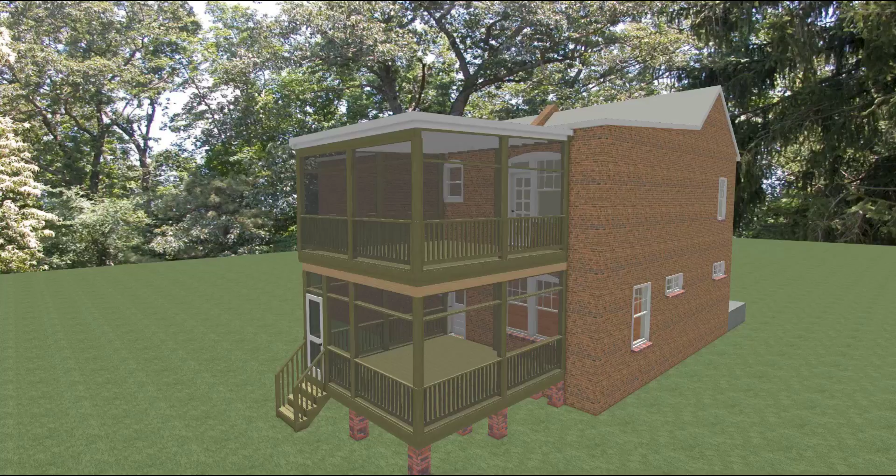Okay, Holly, Steve, this is where we're at for today. Updated the screen porch, got the framing and all pretty much complete. So what I'm looking at, I'm using different color materials just so it'll be easier for you to see some of the things, such as the beam that I'm pointing to there is a beam that's underneath the floor joist. And then the rafters, I'm using a different color for the rafters. Again, just for show at this point. So that way you can see the difference when some of these materials come together.

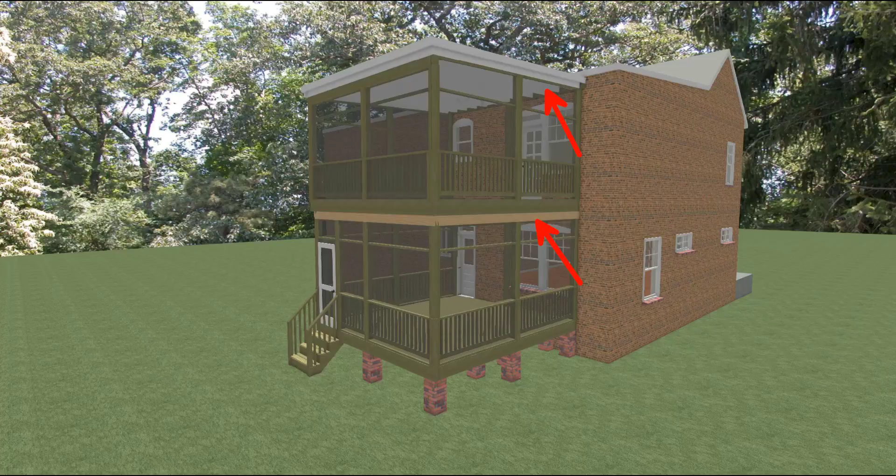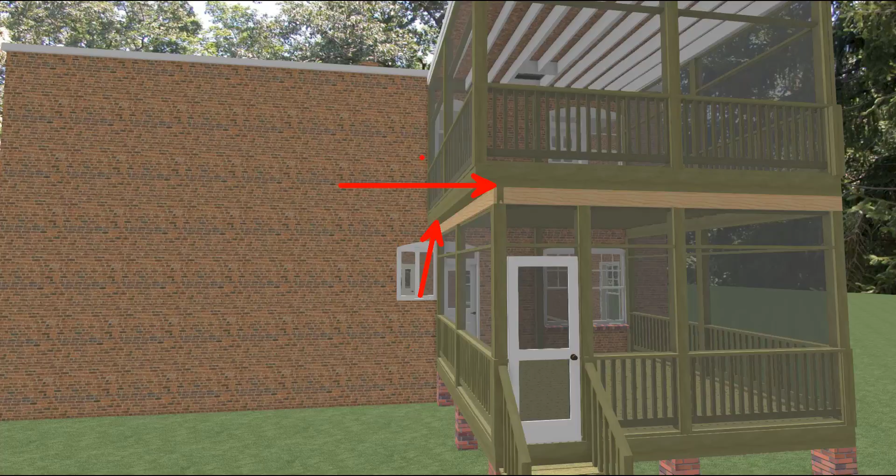So let's rotate this on around. Everything came together very well as I was expecting. So on this side, as we talked about, we do have our cantilever out to this side. So you can see that all the way down. That's 8 inches, gives us just to the outside of that window. So we're all golden with that.

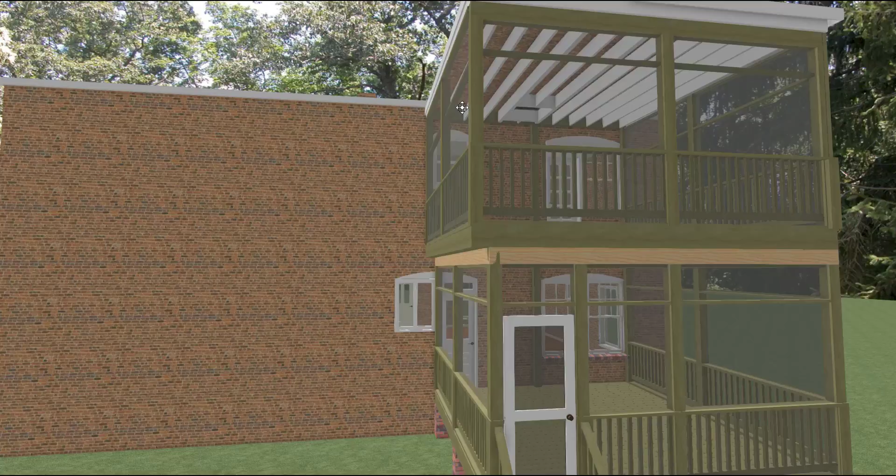Then upstairs we've got that framed in for the roof hatch. And I didn't know if you were looking to do some type of a beaded ceiling or something to that effect. As of right now, I am just showing it with plywood on top of that roof and then all the rafters exposed. So that's one that Steve and yourself can decide on. It's not a permit issue.

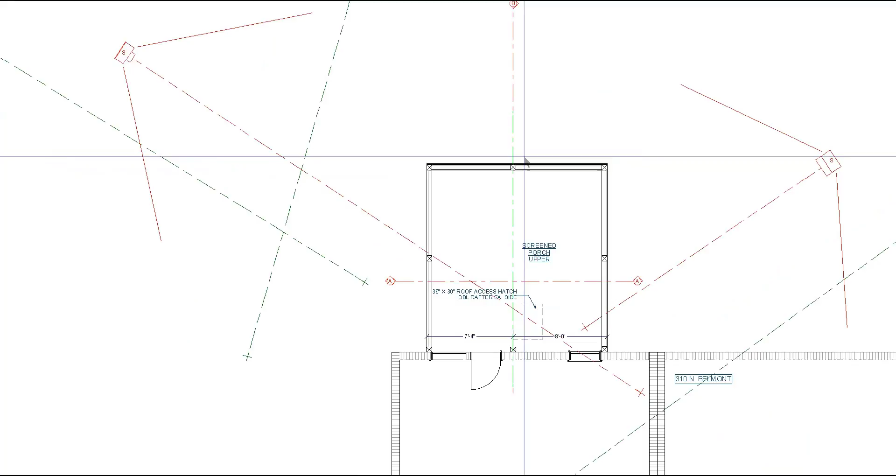Then let's swing back into the floor plan. And let's start off upstairs. I've cut two sections, right to left and front to back, to be able to go through and detail things out for yourself and for the engineer as well. What we're looking at here is we do have that roof hatch that you'd asked for, 36 by 30. And then the post here would be a center post. I've got a beam running across the top in the roof system up at that height to be able to carry that.

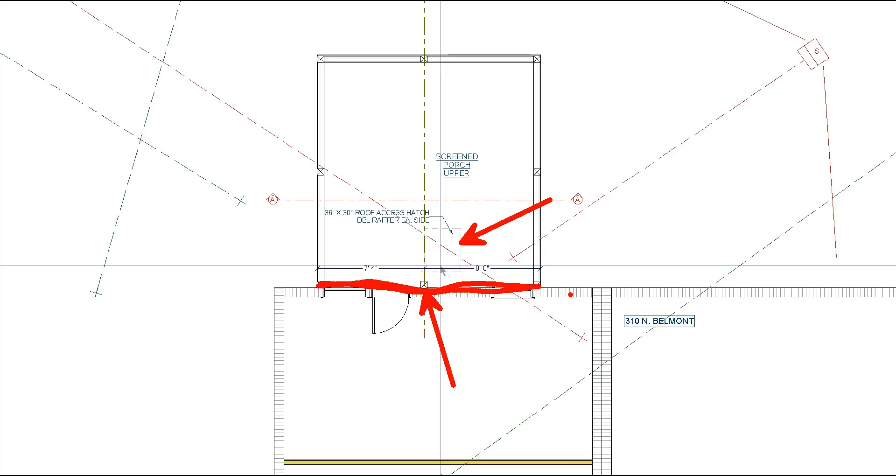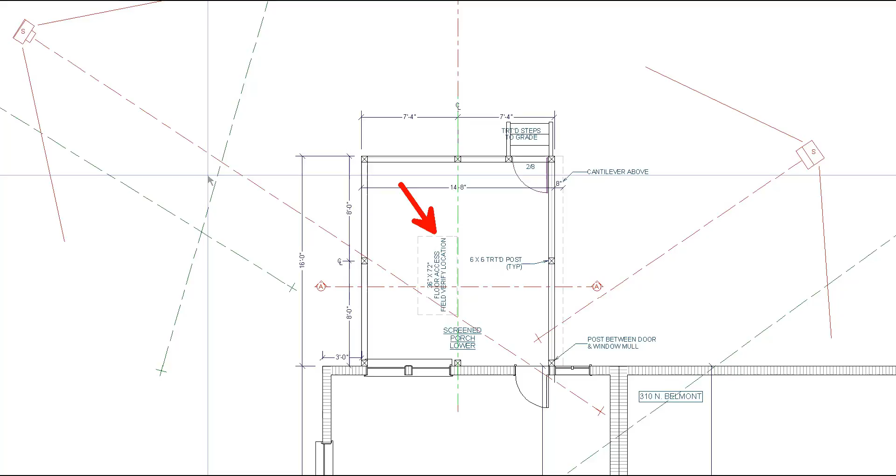So let's go down a floor, and when we're down here, we've got a 32-inch door, again showing the outline of that porch on the floor above. So here, Holly, we have that floor access in, the approximate size of 36 by 72. The door going down into the storage below is only a 30-inch door. Anything that would go through the door below, you'd be able to get through here.

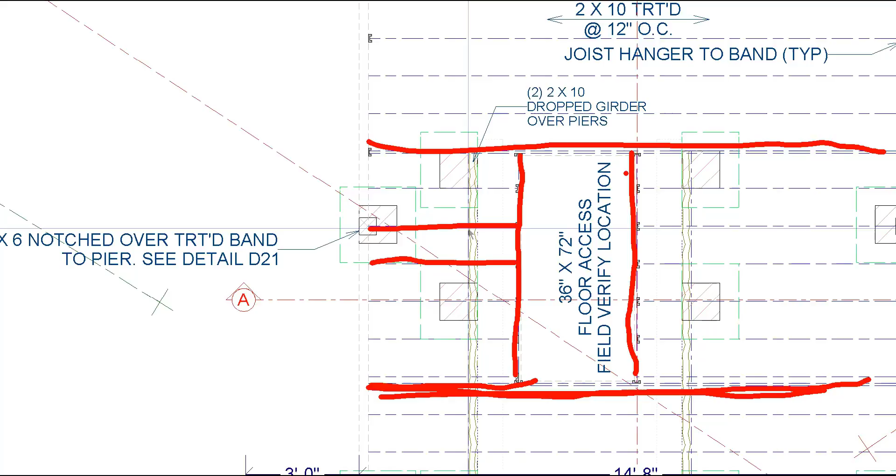Then let's go into a section. This is a section that's going right to left. So if we get down here, again, this is the girder that we were talking about that's sitting on top of a pier. So we've got the pier there. Same thing to the other side. We're putting hold downs here and here at each joist. As we come across that girder, we are doing hangers to the outside band at the floor system.

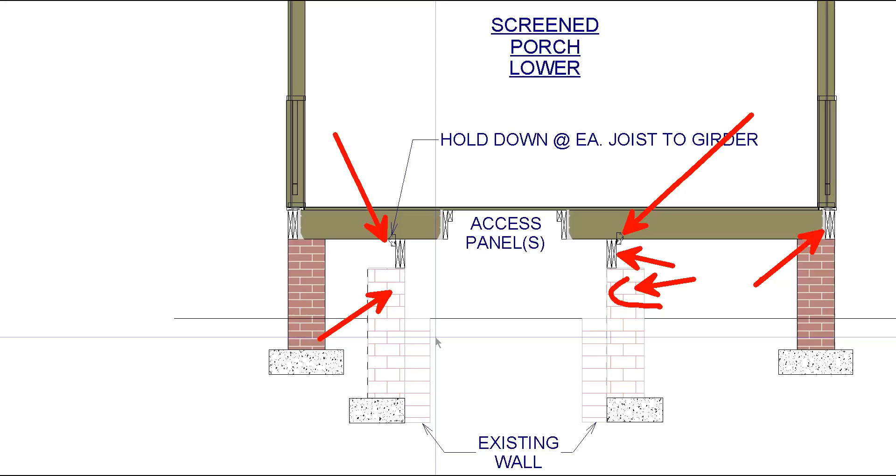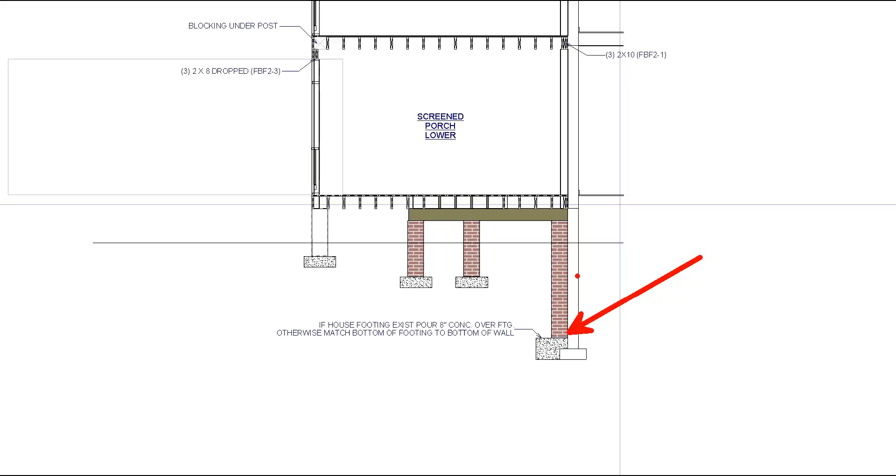Then we've got our three 2x8s for beams up top. And let's come on down. Then we've got our rafters up above. Let's look at the section going through the other direction. One thing that we'll need to do is the footing needs to be down at the same level as the foundation that's in your house now. So Steve, that's probably going to be about 48 inches deep if I'm not mistaken. And then that's cut through the roof hatch also, so you can see what we're doing there.

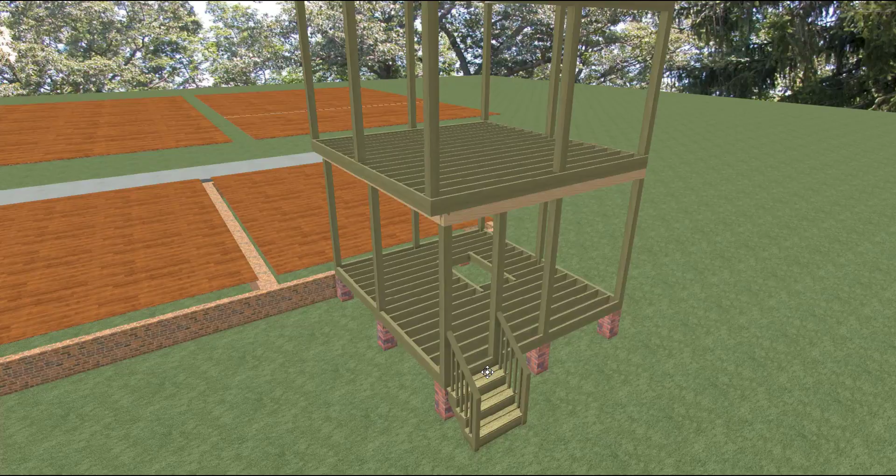All right, and here we are into the framing view. So here you can see where we've got the roof hatch cut in. You're starting to see some more of the details with the framing with the floor hatch cut in as well. And with the overhang, you're starting to pick up some of the framing differences there. So that'll give you a good idea of what we're looking at as far as framing.

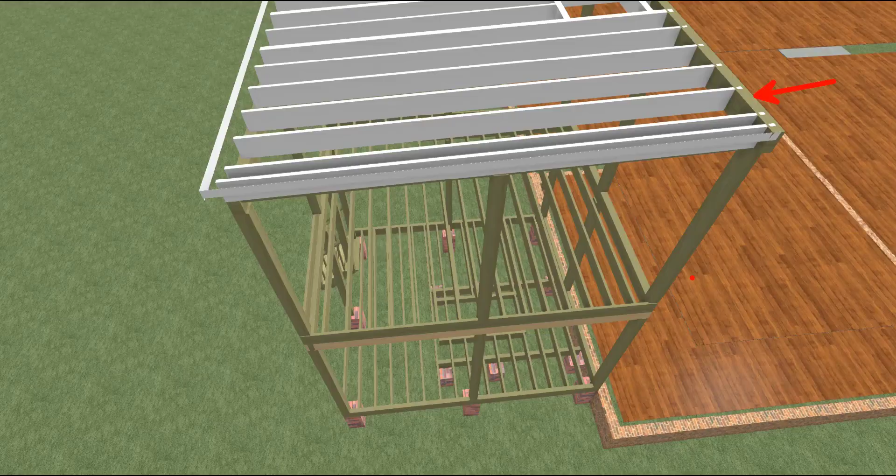We've got the porch beam here that would be up against the house. Essentially, this is going to be a freestanding screen porch where we're not going to be attaching it to the house. That's one of the reasons we have all these piers into it and all the tie downs as well.